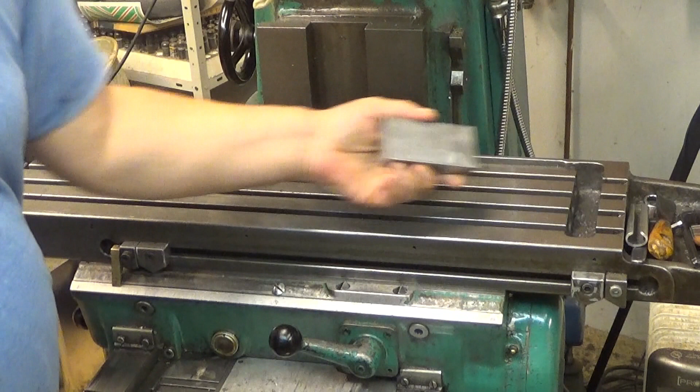Okay, so now let's go on with how to set up a workpiece into the milling table if you don't have a vise. We need now to attach this workpiece into this table, reliably, straight and in a good place. Well, I'm using parallels here. Parallels like this. These are 10 millimeters wide and 20 millimeters high. And about the parallels, the width is not guaranteed to be even. The height is. So I use them this way.

And now when you put your parallels on the table, of course, goes without saying, you have to clean up the table pretty well before putting anything on it. Yeah, that's quite important. And then when you put a parallel here, you check that the parallel is also clean, and it makes a specific sound when it's making a full contact. You can hear it, it's like sizzling. It's not rubbing, it's sizzling. And same here. If I now can find a place where it doesn't sizzle, well, I cannot find a place where it doesn't sizzle. Okay, then you have your parallels there.

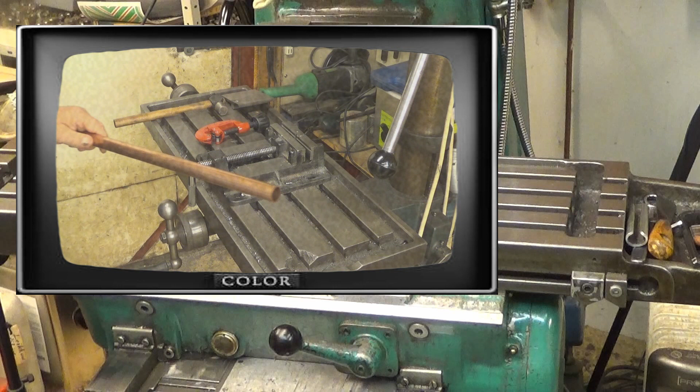That's very easy. For those copper pieces I use a copper tube like this. First I will take, well, let's see now. I have a tool like this. It has a rolling blade here. And this is normally what you use when you cut copper tubes. And then you put it like here somewhere. And at this point you determine how wide these become. And then you just rotate it around and tighten it while you rotate it.

And at some point that tube just cuts off. Now it's very near. There you go. One. Put that material away, that one also, and now we have these nice little things which I just squeeze here in between. Well, just squeeze them.

Put it there and then just hammer it flat. Don't hammer your fingers, that would be not very nice. Okay, we are ready with these. Let's now use the new ones which we just made. They come to the ends here. And now we also need these guys.

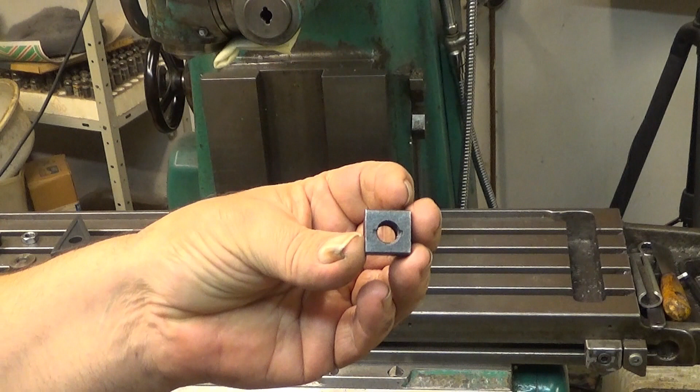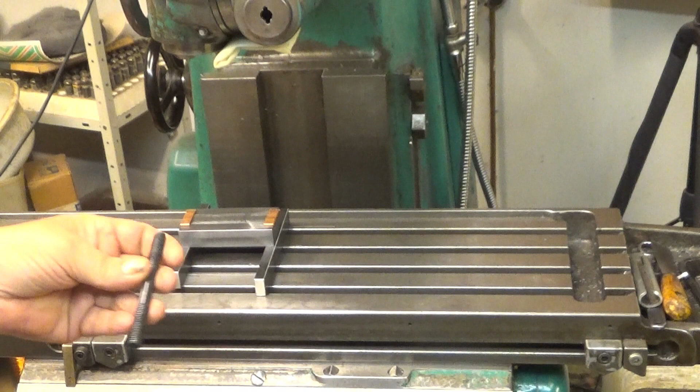That is one part. Well, I usually measure it, I know because I already made this, but let me show how I do this, because you need to choose the suitable stud there. Well, let's talk about these T-nuts first. So, this is a T-nut. And if you can see, there are some dings there and there. I made those. This is so that when you put your screw here, it doesn't go past that point.

I don't know how many people have broken their milling table by having T-nuts that you can screw through, and then you can tighten it without tightening your workpiece, so that it will break your table. Okay. So what I do, at that point I usually don't have these here. I just put this here and then I drop it there. Okay, that's suitable length. That's quite simple. And then let's put this there and that there.

Now, these parallels, when they are positioned here, should be a little bit over the edge in this case. Then I know that I have enough room to drill my holes. Furthermore, I usually check by pushing at the corners that it doesn't wiggle. This doesn't. So, now we have one piece here like that, and then we put this with the copper thing here.

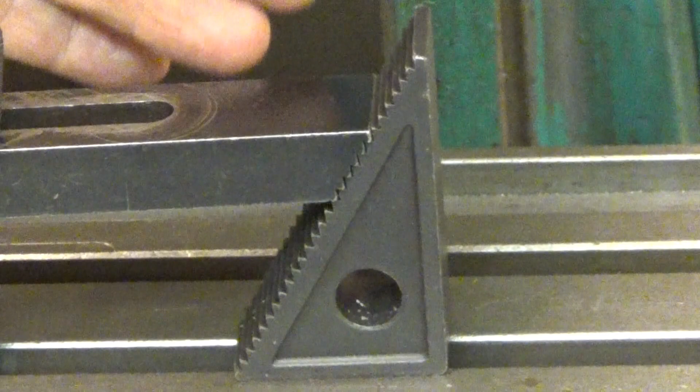And now the orientation of this thing: I need to put it at the very edge to work correctly. It should be leveled so that it's not too high or too low, so that this is about level. And of course the teeth here must go into each other. No chips in between, so they should be clean. The next step is of course the nut here. I tighten it just very mildly, finger tight only at this point, so that I can still adjust these. There you are. And then we rinse and repeat the other side as well.

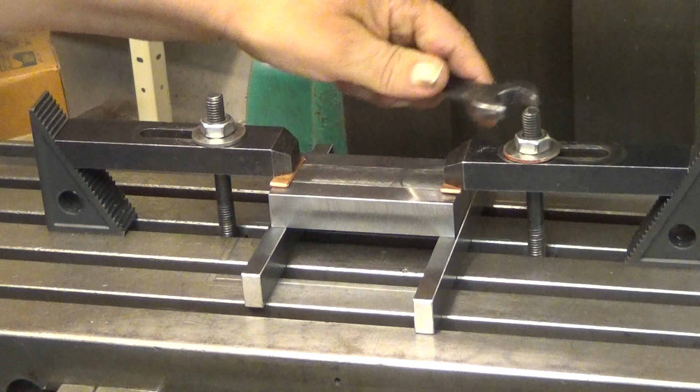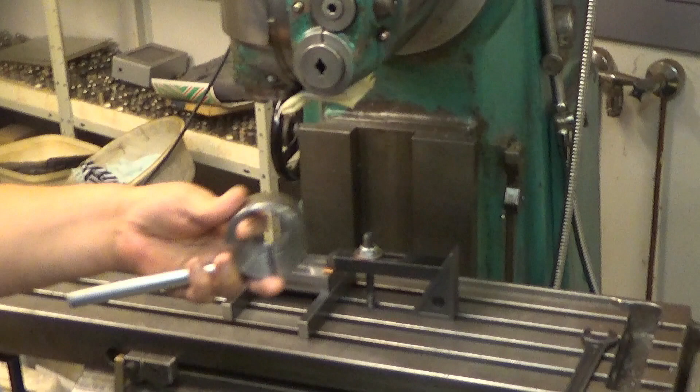I tighten this one quite tight already, and this one just so that it doesn't lift up. No more. What I want is that it will be pivoting at this end when I try to straighten it. You might think this funny, but I usually put it a little bit tilted already, because it's easier to knock from this side than from this side. Well, let's first set up a dial indicator here. I'm using this. I have made this for this purpose only.

This milling machine has these overarm supports like this. You can pull them out. Then I tighten it back in that place. There you are. And then I just put this into this hole. Like that, maybe there. And then I tighten this here. And that's steady. And then I put my dial indicator here. Goes into that hole.

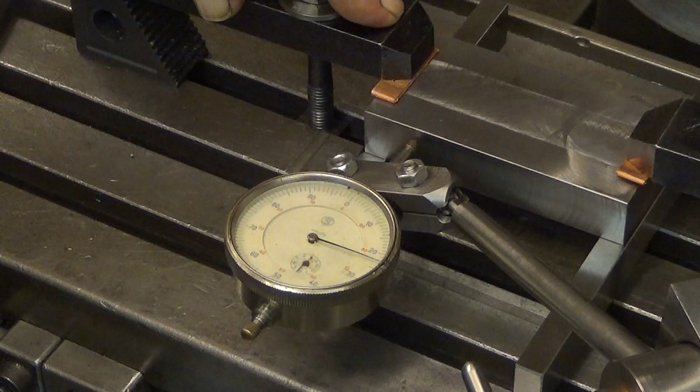First, this side is now tight. Not completely tight, but quite tight. And that side is loose, almost finger tight. And now I go to this end. I assume it's pivoting about that point. And then I adjust the Y-axis so that we are at 0. Like there. And then I lock the table, the Y, and then I start dialing.

As you can see, this means that it's now lower. So then I knock here at the end, very gently. Okay. I knock a little bit more. Now I lift this because I don't want to spoil my... Okay. We are very near. Oh. Okay.

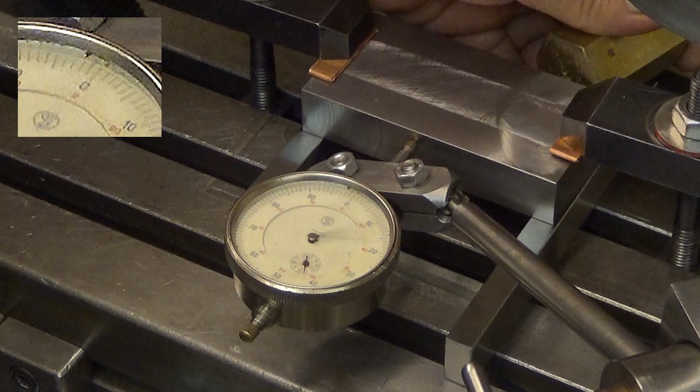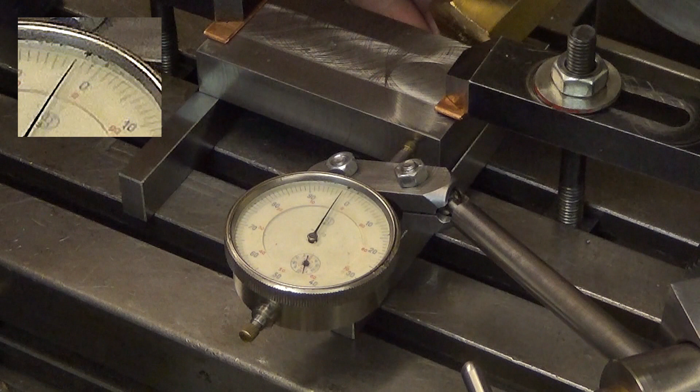Now that it is 0, I go back here. And you can see that it's still a little bit off. It pivoted not exactly at that point, it pivoted from somewhere else. So I need to 0 this again and just rinse and repeat. Oh no, okay. Like that. Then I go back here. And then I adjust the Y one more time. Now we have 2/100ths of a millimeter difference there. There you are. And then let's go.

Well, I'm not sure whether this is... this needs to be knocked really gently. Oh, went out. And you always measure it in the same direction. Okay, now let's see the last and final time. I try to get this as precise as I can, and it shouldn't move a lot. Well, 1/100. Okay. Let's take that away. There you are.

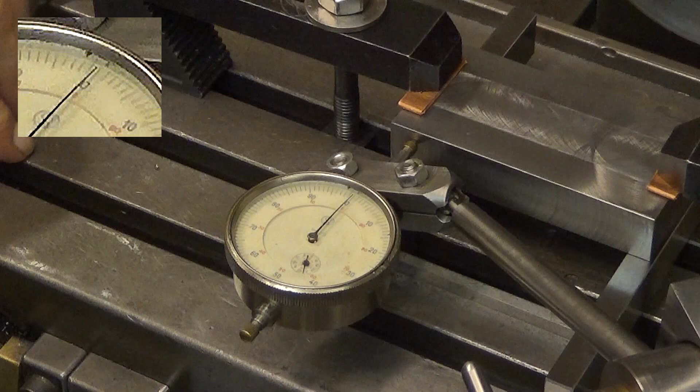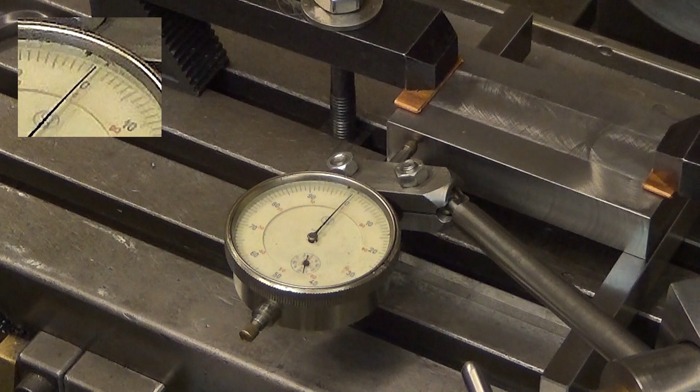Now a final check. It's 0, is it? Oh yeah, okay. I'm just knocking this to ensure that the dial indicator is really measuring something. And yeah, there you are. Okay, so let's repeat this.

So when you want to straighten such a piece, do it so that you know where it is pivoting. If you do it like knocking it each and every way, you will be chasing your tail the rest of the evening. But this way you get it, well, the maximum is absolutely 5 scans. Then, if it's not straight, then the workpiece itself is somehow curved.

Well, but as you can see, at least the surface is straight. And I know it's perpendicular to the sides, and it's also parallel to the other side. Well, there you are. Now this workpiece is straight. It's either perpendicular or parallel with the milling table, however you think it. But we don't have the faintest idea where it is. It's straight, but it is just somewhere.

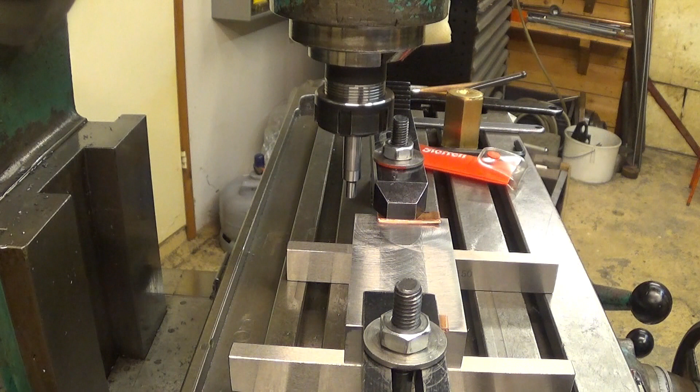And now how to set this up is that you go near the surface with this, like that. Somewhere there maybe. Oh yeah, okay, there you are. A little bit high, like that. Okay, maybe there. Then I lock this direction. Well now, these don't like to be run slowly.

And so I explain to you now in advance what is going to happen here. When I approach that surface by moving this table like that, it will stabilize, and at some point it kicks to the side. That is where our edge is found. And when it kicks, I will lock the table right away. And then I reset my dials, and then I will do it again.

Okay. And I'm running this at about 500 RPM, so this will be somewhat noisy. Sorry about that. We are approaching now.

I will move this pointer to a suitable place. I will move it to here. Hopefully it can go to 0, yeah? Okay, let's put it there. I might be in your way, but there you are. When this pointer is 0 and this one is also in 0 position, then we are at 0.

And then I can move, for example, to 10 millimeters here. I approach it. I can see now it's a little bit over 9 there. And then I just move it here to the exact position. So this is a very fast way of moving things around here. Well, it's a Stone Age version of DRO.

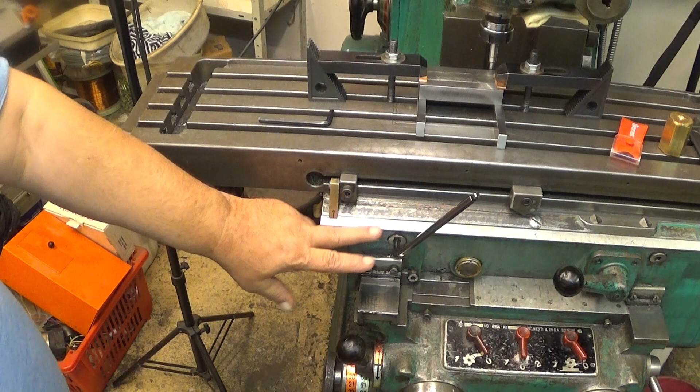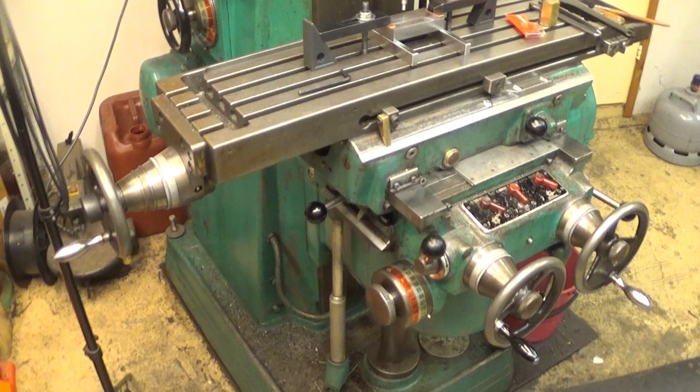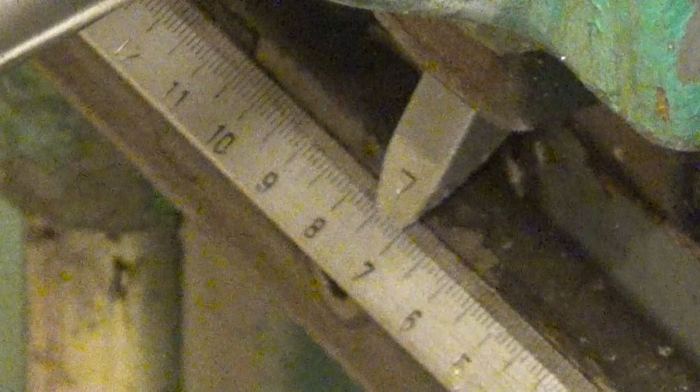Here, under the machine, we have the scale for the Y. Well, it's in a little bit awkward place, but let me zoom you in here a little bit. Like this. Well, yeah, this is not the easiest thing to adjust. This is something that Schaublin didn't do a proper job.

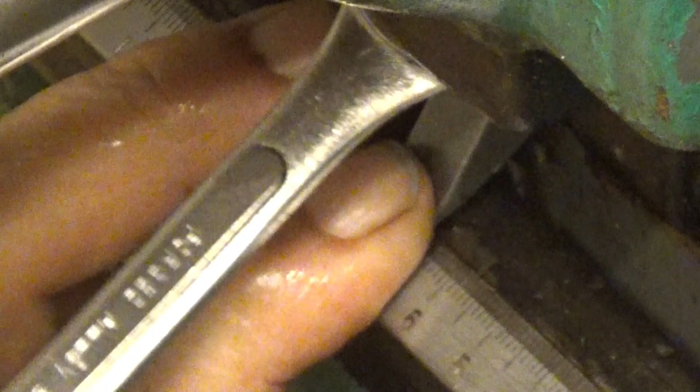I usually just choose some exact millimeter here. In this case, it seems to be 7, and try not to move it when I tighten it in place. No, it's not in place. There. Yeah, now it seems to be. Yeah. There you are.

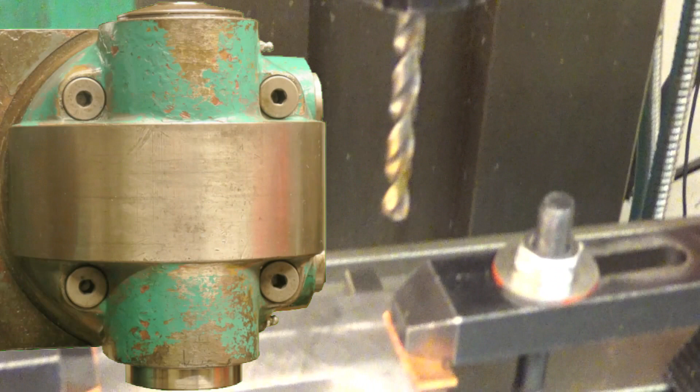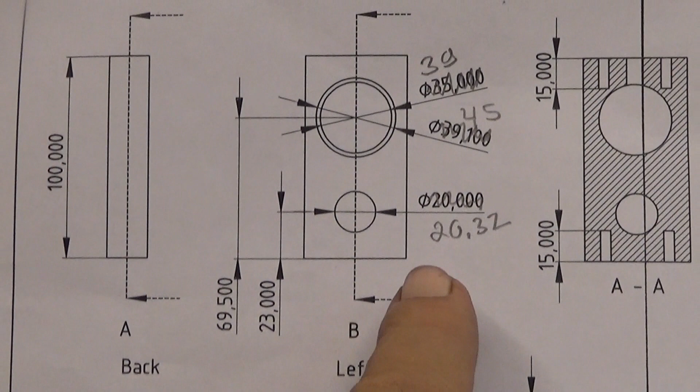Okay, now let's set up the coordinates for the first hole. In this document, there you have it. It looks like the X direction is 23 and the Y direction is half of 50. So it will be 25. So let's make the X direction first. So I rotate here, hopefully this focuses, to 25. So it's 20 here. And then, oh no, not 25, 23.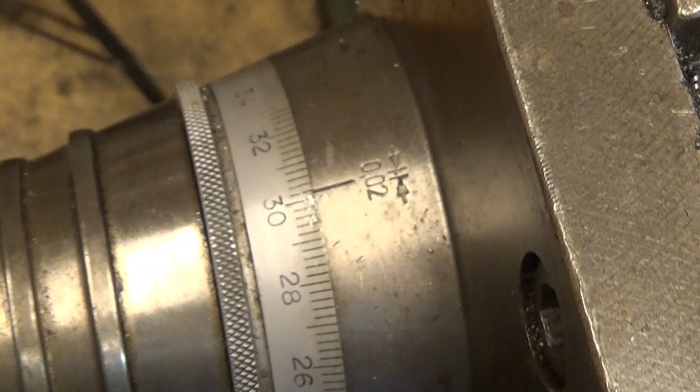23. So that's quite near 23, and then we go here, and it's at 3. Went a little bit past. If you do that, you don't just come back like this, you have to come quite a lot, and then try again. Now it's quite exactly where it should be. And then I just lock the axis. There you are, locked. And then 25 for Y, okay.

And so 7, that's 1, 10, that's 20, and about there. And then we need to go to this, I believe. Like that. Let's see. Looks to be that. Then I just lock the X. This is the X locking. And now it's on the correct place.

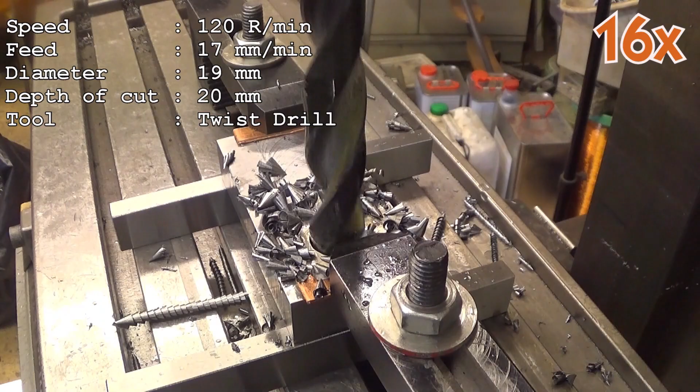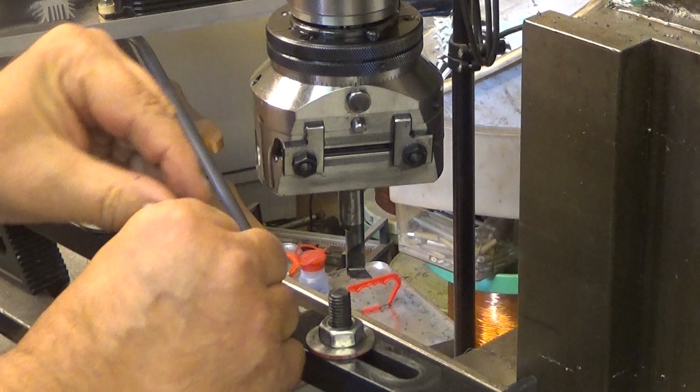Well, I can always come back to the original position. Well, now, yeah, the surface finish is really nice. So let's see now. And I always check it like this, that it really touches everything, so then I just push it until it drops like that. Yeah. And then this one, well, let's see now. We should be around 19 point something.

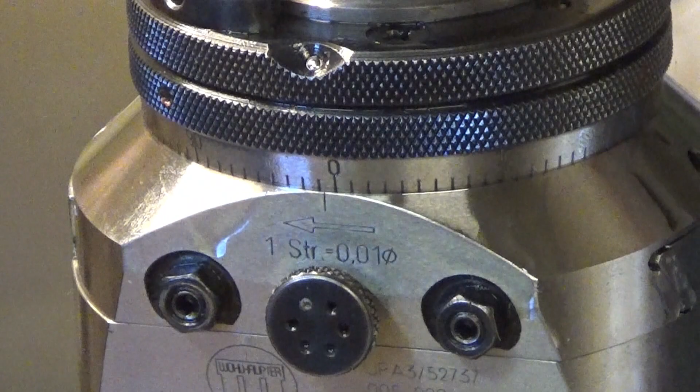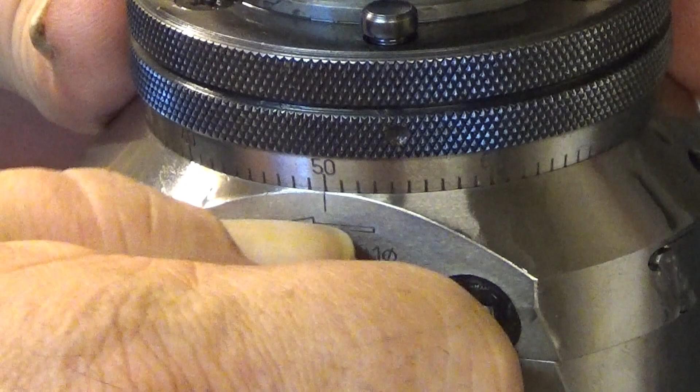Well, it's 19.22. So let's advance this 0.5 millimeter. This knob here loosens the gibs, and then I just put here 0.5 millimeter. 50. That's 0.5 millimeter. So, if my calculations now are correct, 19.20 something, so it should be 19.70 now, after this pass.

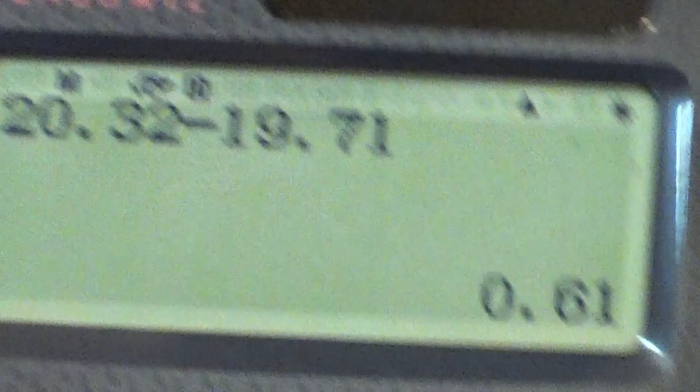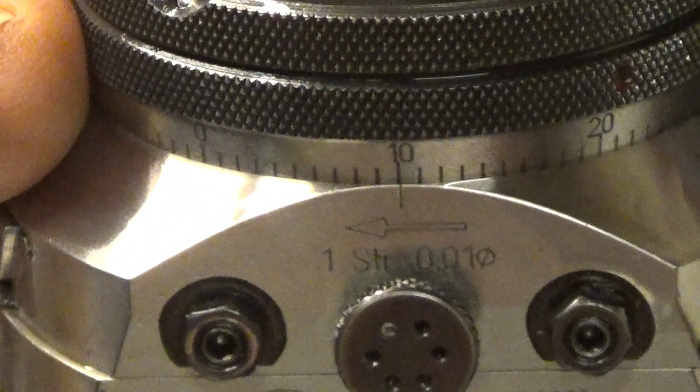It's 19.71. So our goal is 20.32. I have to calculate this. 0.61 millimeters. Let's move this to 61. So when we move it to the 0, that's 50, 60 and 1. There you are. Tighten it. This will be the final pass.

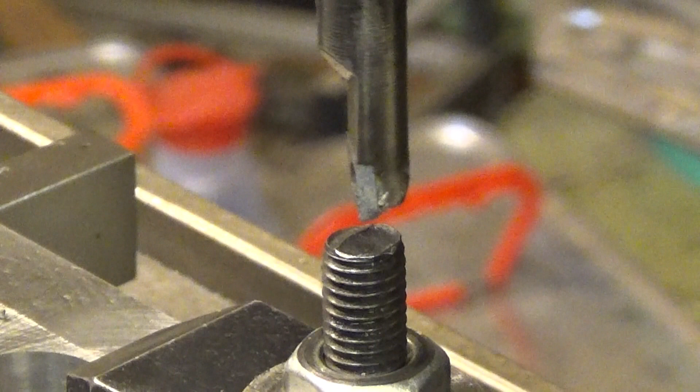It should be 20.32. Wow. Now pushing it like that until it drops. And well, not too bad. It's okay. So the first hole is now done. Well, that hole became really good.

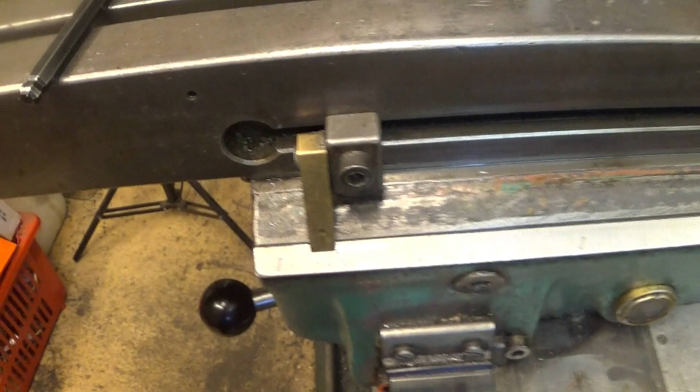The next hole will be around here. The document is stating that it should be 69.5 millimeters. So, I'll first unlock the X like that. And then 69. Oh wow. 69 is here, and then 0.5 millimeter more.

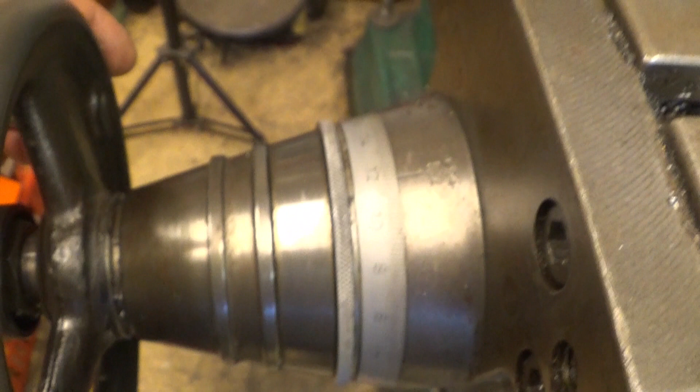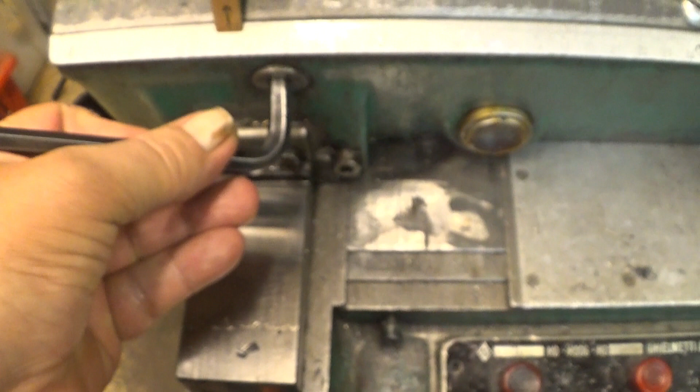And it went past, so I have to take it back and there you are, half a millimeter more. Okay, there. And then I lock my axis here. And this is just sanity check. Looks like it's in the correct place.

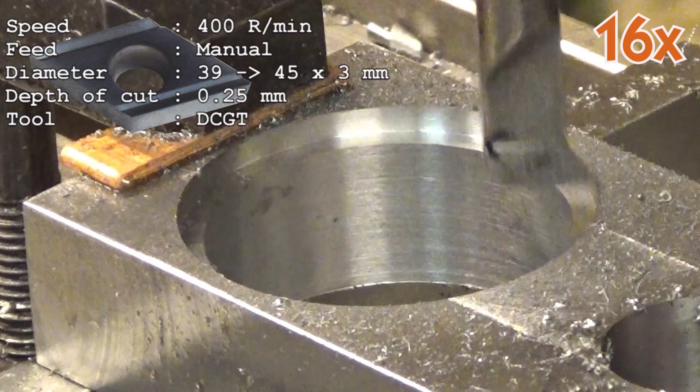That about concludes this episode of Vintage Machine. Quite a lot of material removal from this piece, and now I didn't make any mistakes. Yes!

Well, it earns to be a little bit sharp, would I say. In Finnish language we say that you are sharp. Well, observant or whatever that is. Okay, anyway, succeeded to go through this thing without any mistakes.

So, in the next episode we will be doing holes for attaching bolts on them, and also one hole at the top. It will be serving two purposes. I will reveal it back then, and then a smaller hole all the way through. Well, yeah, lubrication. Of course, you need to lubricate those bearings somehow. And it will be grease, not oil. Grease because if you are working with paper, oil would be very bad if you have oil stains in your paper, unless you want to.

Okay, well, maybe in the next episode we also have a name for that pony. My Little Pony. Please not that. I cannot use it. I would be getting copyright strikes right away. My Little Pony. Okay, yeah.